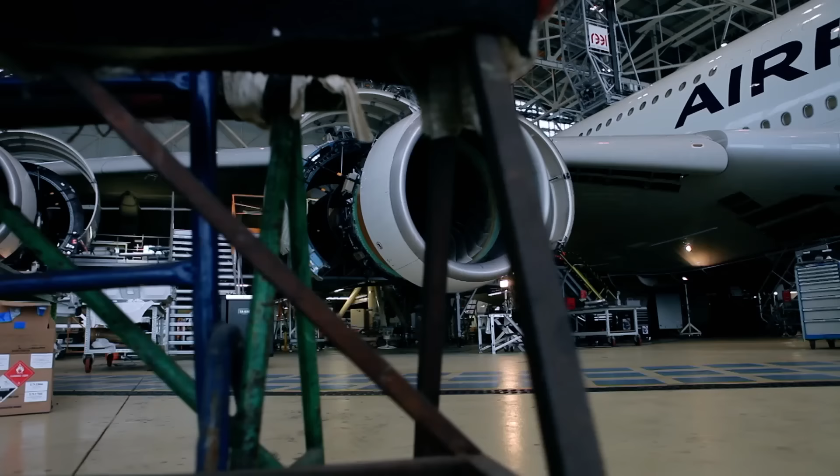The biggest passenger plane the world has ever seen. When you see that huge monster, impossible that this big thing is gonna fly. No way. It's cutting-edge aerospace engineering. A massive fly-by-wire system like this is an incredible tool of safety for the aircraft itself. And the pioneering historic innovations. What an incredible sensation!

Cayley was the first person to recognize the important forces that are fundamental to understanding flight. That made the impossible possible.

Since the birth of aviation a century ago, air travel has reached monumental proportions. Now, over 3 billion passenger journeys are taken each year. That's the equivalent of half the world's population taking to the skies. With terminals overrun and runways congested to breaking point, aerospace engineers are looking for solutions.

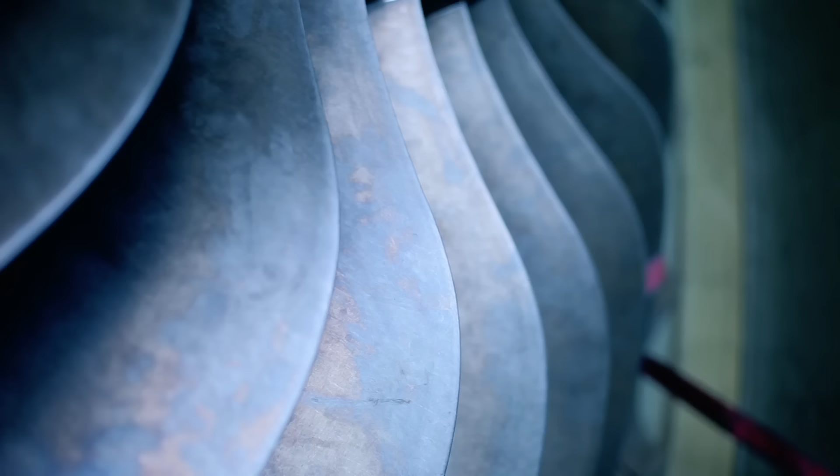15, 20, 30 years ago, the challenge in the aeronautical field was mainly speed. Then the new objective of Airbus, Boeing, for example, was the size of the aircraft. In order to reduce the 100,000 daily flights across the globe, aircraft designers would need to think big. And in 2007, what they came up with would smash aviation records.

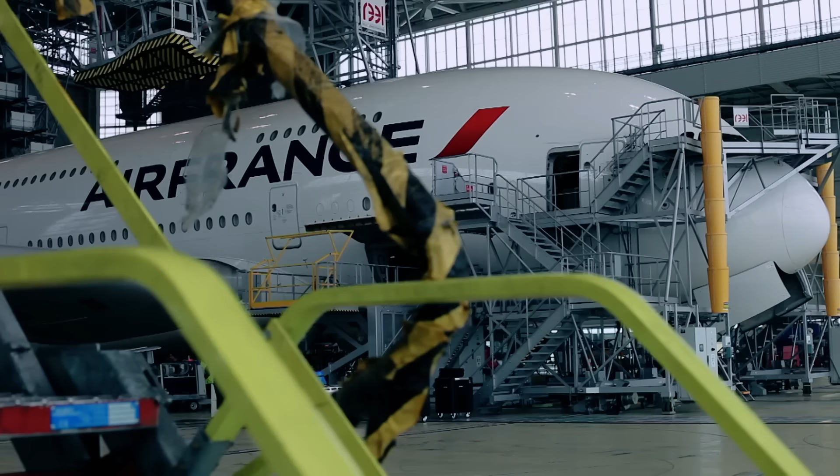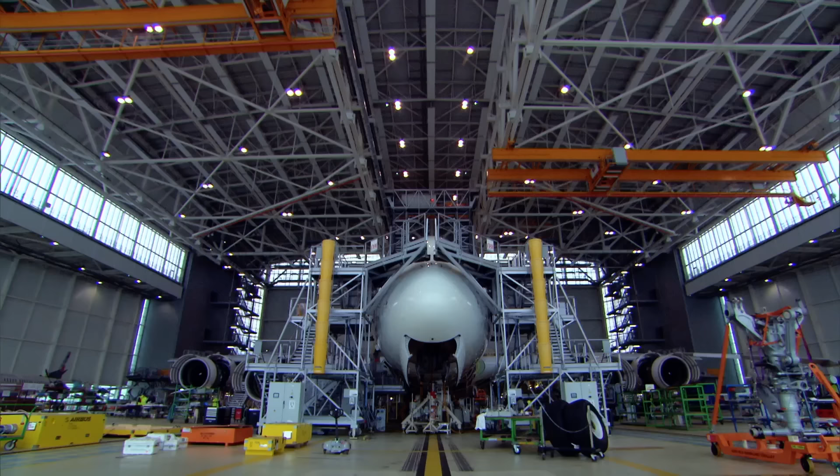This is an Airbus A380, an ultra-high-capacity airliner and the largest passenger plane on the planet. An aircraft so big that Air France have had to create a giant cutting-edge building just to accommodate it. We built that brand new hangar to welcome that huge monster, that huge aircraft, so big that our hangars couldn't fit that kind of aircraft.

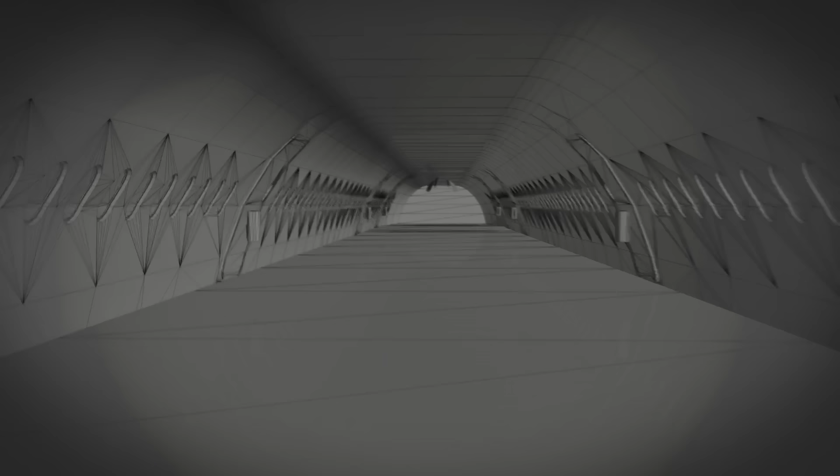This revolutionary double-decker plane has an almost 80-meter wingspan, the largest of any commercial aircraft. It has 550 square meters of usable floor space, a massive 40% more than the next largest airliner, allowing it to carry up to 850 passengers. And its mighty turbofan engines and state-of-the-art design mean it can fly non-stop almost halfway around the planet.

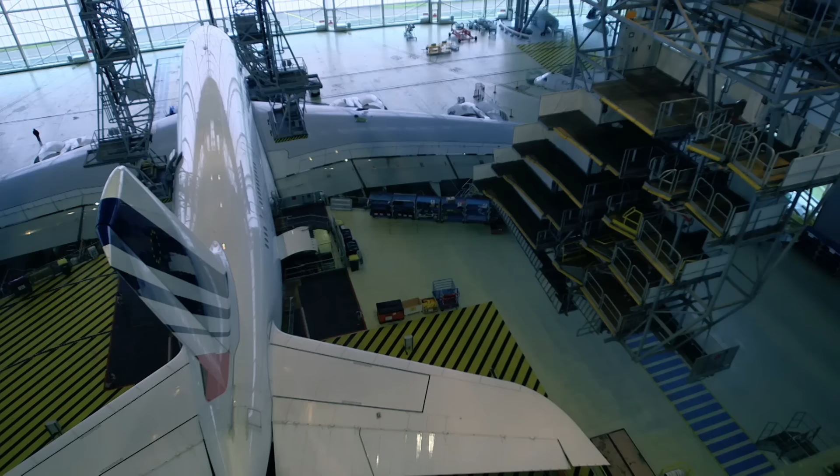At its custom-built high-tech hangar in Paris, this Airbus is being stripped back as part of its scheduled 4-year service, revealing the secrets of its engineering success. And for maintenance manager Sylvain Fargo, it never fails to impress. The first time when I see it, the first word was wow, and it's still wow when I see it.

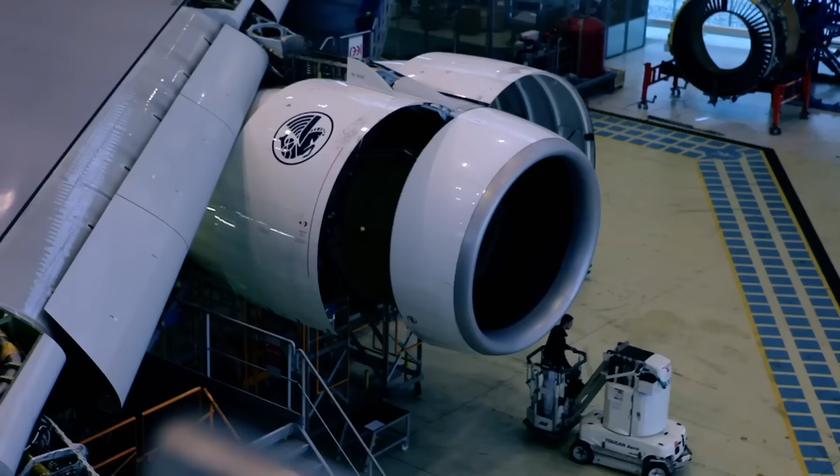This aircraft was part of what we could call a jump in the aeronautic industry. New technologies required from us to train our mechanics, our engineers, so it's quite a step through future. The A380 is a colossal feat of engineering that would have once been thought impossible.

In 18th century Paris, the Montgolfier brothers, noticing that hot air made a paper bag rise, built a hot air balloon and made history with the first ever lighter-than-air manned flight. Oh, très bien, magnifique. Although their design did have its drawbacks.

But for a flying machine heavier than air to take off and remain airborne, engineers would have to learn how to harness the forces of nature. This would remain an impossible dream. Until, in 1804, British scientist Sir George Cayley closely observed birds and finally unlocked the mystery of flight, earning him the title, the Father of Aeronautics.

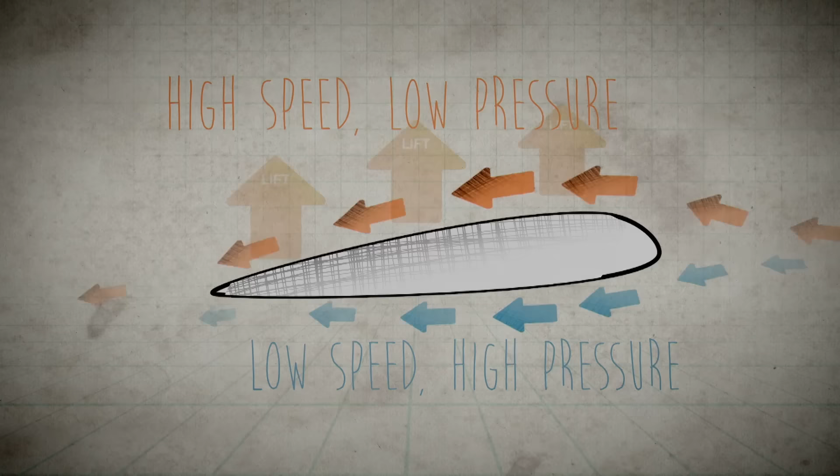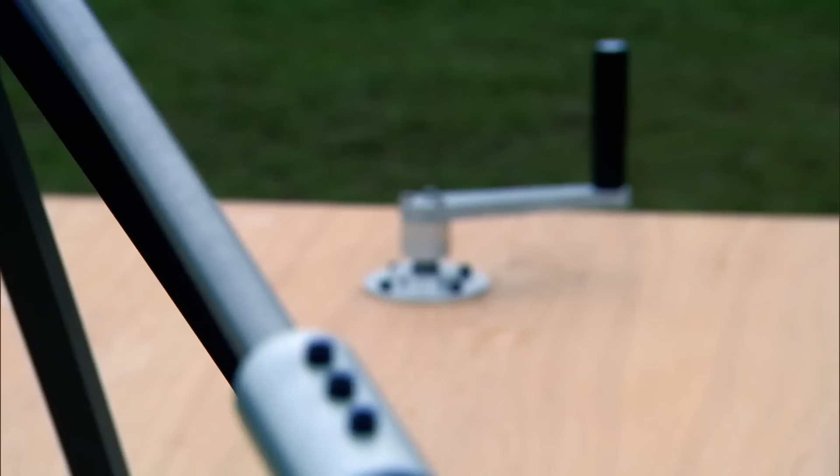By turning the aerofoil upside down, aerospace engineer Dr. Ben Evans can demonstrate how this shape can successfully conquer the forces of gravity. Now, in this experiment, on one side we've got weights representing gravity, the force that needs to be overcome, and on the other end, an aerofoil. And as this spins, the arm goes level. The air passes over the aerofoil and pulls it down to counteract gravity, which is what lift is trying to do in an aircraft, only upside down.

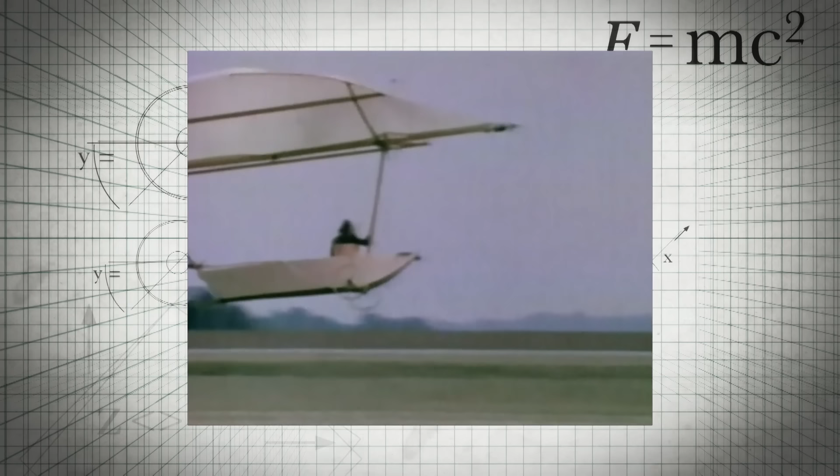In 1853, at the age of 79, Cayley put these ideas into practice and launched the world's first heavier-than-air manned glider. Sir George Cayley had made the impossible possible. It's amazing what you get it to do when you know how.

Cayley's achievements have inspired generations of aerospace engineers to reach for the skies. By doing some very simple experiments, he managed to show what allows a wing to generate lift, just like the wing of this glider that is allowing us to hang here in the skies.

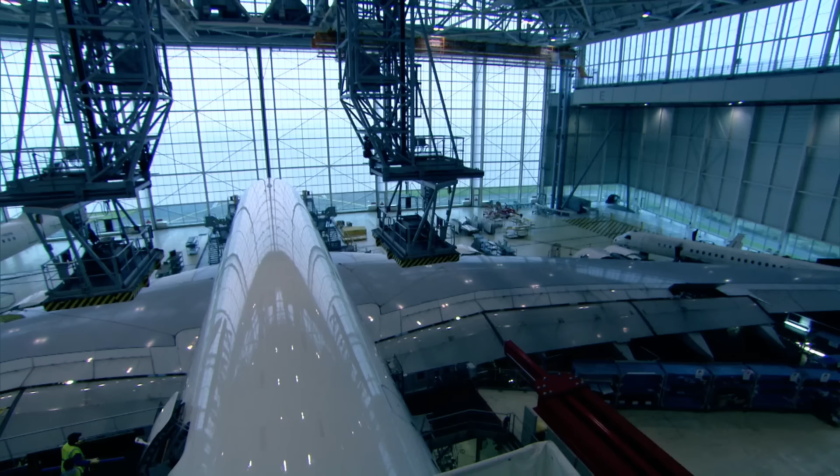Without the concepts that George Cayley developed, the giant engineering feat of the Airbus A380 would not be possible. When you see this aircraft so huge, you can say, but impossible that this big thing is gonna fly. No way. But in fact, it's only aerodynamics.

The A380's wings apply the same principles that Cayley exploited, but on an enormous scale. With an almost 80-metre span and a surface area of 845 square metres, they're big enough to park 20 of Cayley's gliders on top. In its custom-built hangar in Paris, this A380 is in for a comprehensive service, allowing technician Charlie Jackson to get up close and personal with these engineering masterpieces.

As this aircraft is taking off down the runway and generating speed, the tips of the wings actually will raise up about 4 meters, which is a sign that the wing is generating the lift that it's going to need to carry such a large aircraft into flight.

To create a wing big enough to generate lift but small enough to minimize drag is a design conundrum. On the A380, special high-lift devices, slats on the front and flaps on the back, allow the wing to increase its size and curve depending on how much lift is required. The wings also maintain the plane's aerodynamic qualities in a more surprising way.

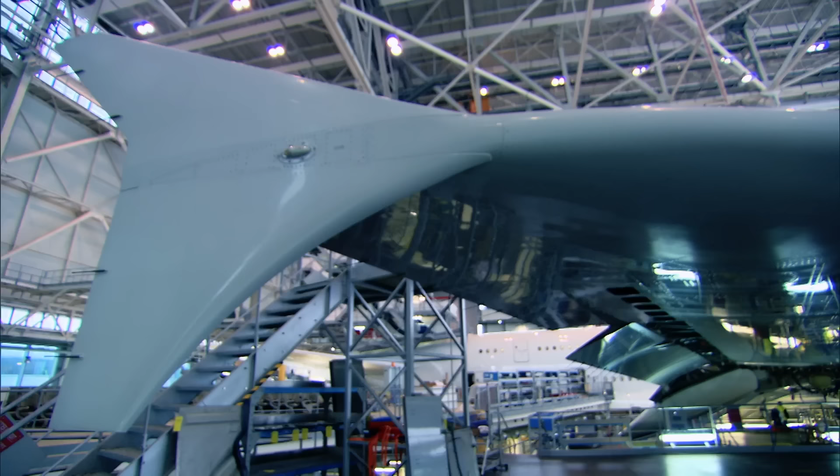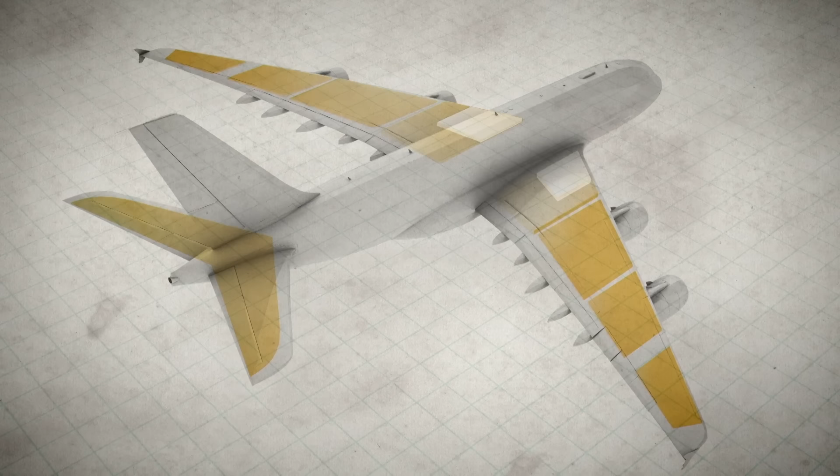The inside of these wings is the fuel, which you need to complete your flight. The plane has 11 fuel tanks, 5 in each wing and 1 in the tail. Fuel is stored in the inner tanks to reduce weight at the wing tips. After takeoff, it's pumped to tanks across the whole wing. Throughout flight, the system constantly adjusts the fuel to maintain the centre of gravity.

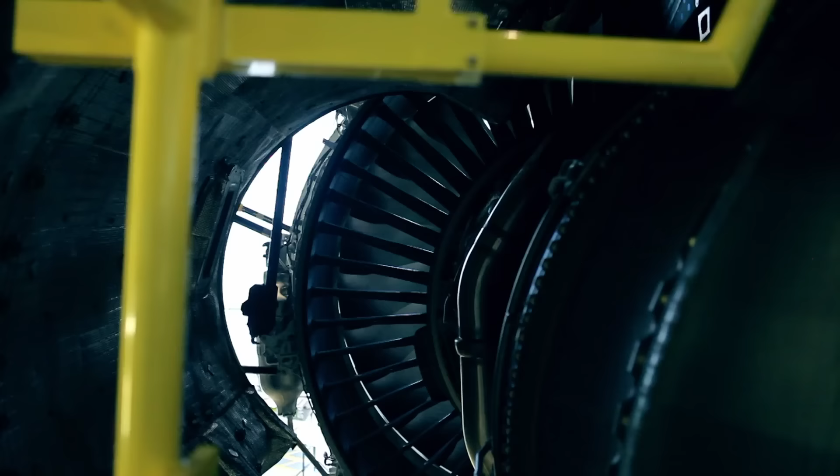This wing is the product of good design. If it hadn't been that way, it just wouldn't be practical to make an aircraft that size. But to create a super jumbo, unlike any other plane in the skies, its designers and engineers would face further major challenges and have to draw on innovations from the past. What an incredible sensation! I can feel the acceleration pushing me back into my seat. To produce more impossible engineering.

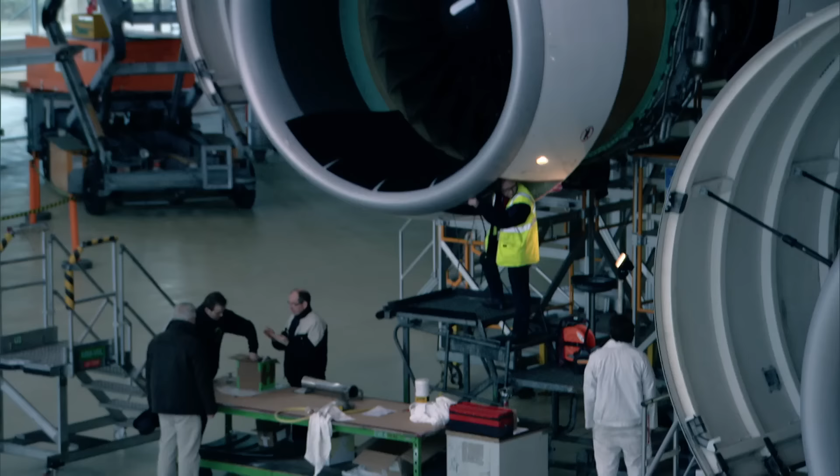The Airbus A380 is a triumph of 21st century aerospace engineering. The largest commercial airliner in operation today. At its state-of-the-art, custom-built hangar in Paris, this A380 is undergoing its 4-yearly service, allowing admiring technicians to get intimate with this colossal feat of impossible engineering. It's a big aircraft. You cannot imagine that it's going to go and fly so easily.

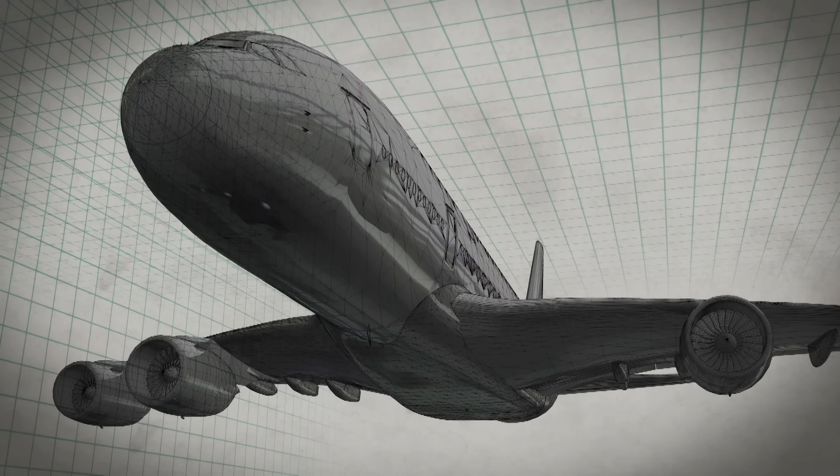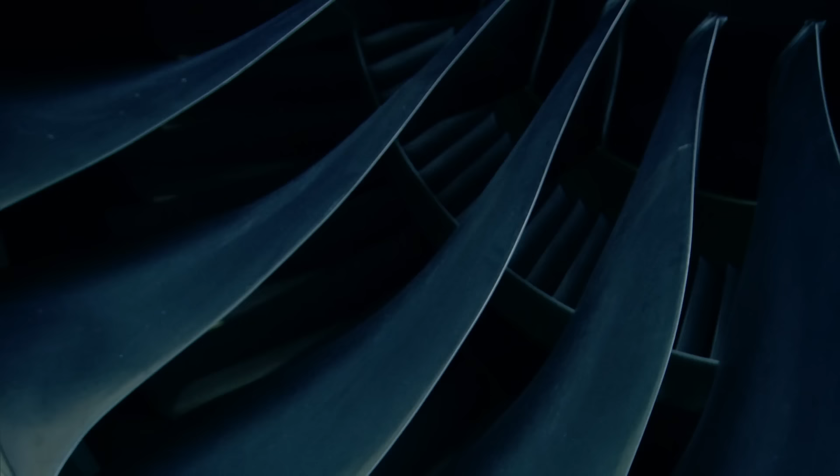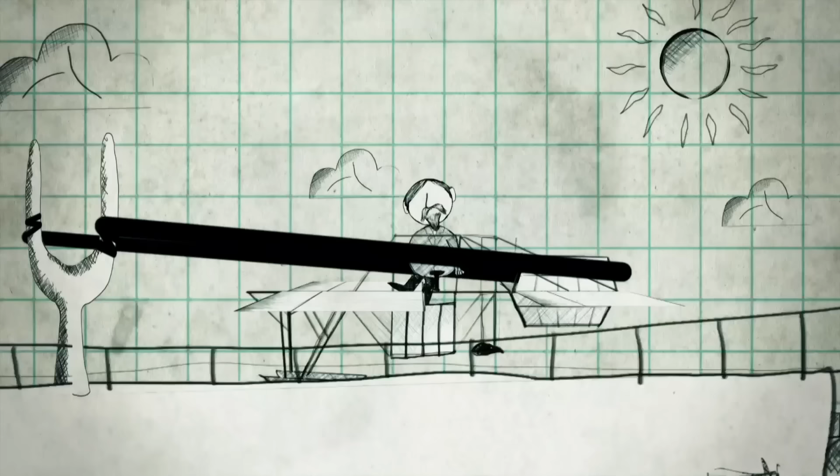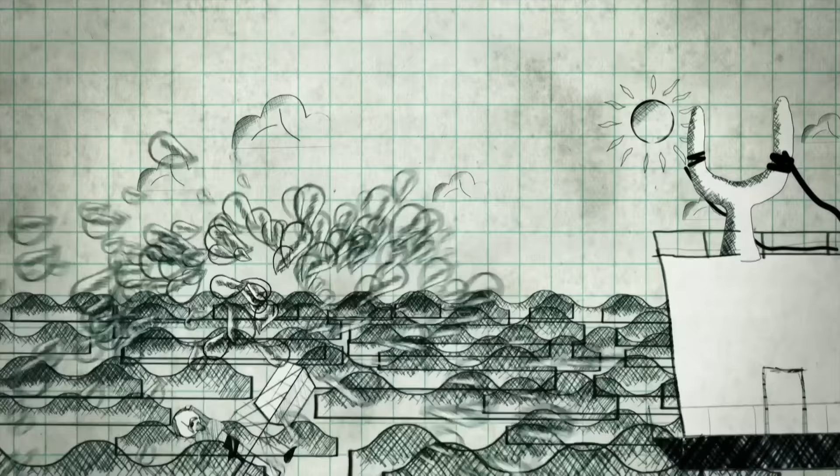By the late 1800s, aviation pioneers recognized the need for power and thrust to obtain flight. In 1874, Frenchman Félix du Temple attached a steam engine to a monoplane. Et voilà! But the weight was all too much. Sacré bleu! In 1903, American professor Samuel Langley built a giant catapult to aid launch. But the takeoff didn't go as planned. Luckily, 2 siblings from Dayton, Ohio were about to make one of aviation's most significant breakthroughs.

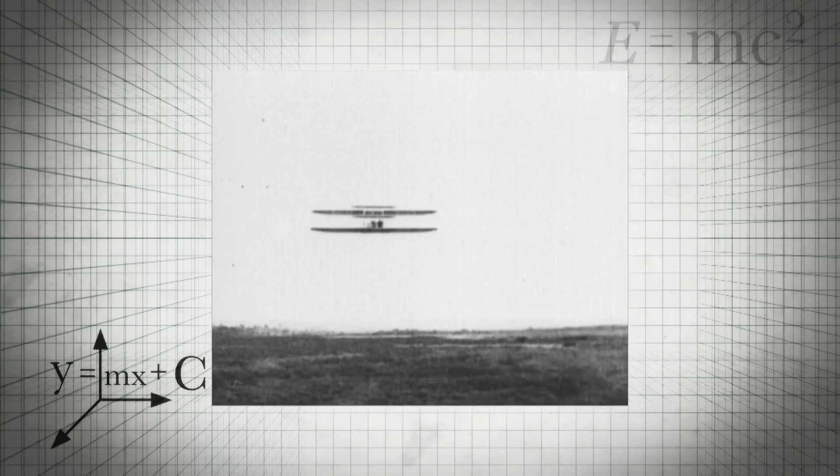In December 1903, Wilbur and Orville Wright launched the maiden flight of the Wright Flyer. Two propellers driven by a piston engine gave the plane enough thrust to take to the air. Although only lasting 12 seconds, covering 36 meters, it was the first controlled powered flight and heralded the birth of modern aviation. However, more than a century on, getting a plane more than 1,500 times heavier than the Wright Flyer airborne would be impossible without a remarkable British innovator.

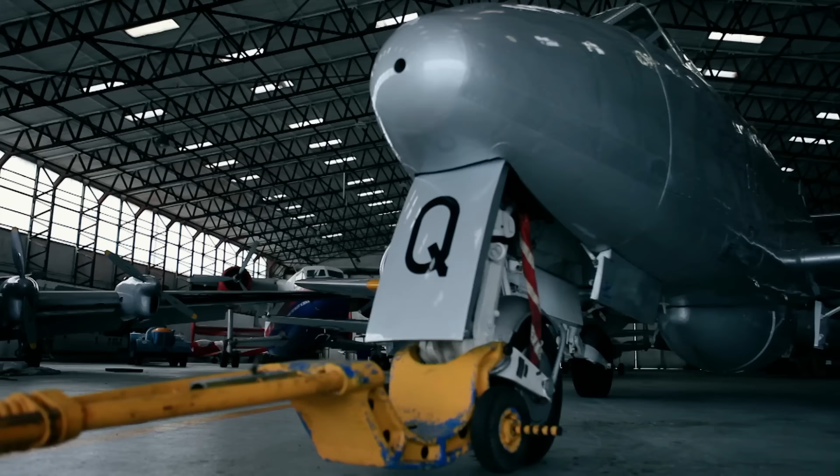Up until the late 1930s, piston-engine propeller planes had been the aviation standard, but they were limited in range, speed, and altitude. A radical solution was required. What an incredible sensation! Aerospace engineer Dr. Ben Evans is experiencing firsthand the power of the Gloster Meteor, Britain's first ever jet fighter, and impossible without the genius of a British engineer: Frank Whittle, pioneer of the turbojet.

I can feel the acceleration pushing me back into my seat. And these two engines kick into work either side of the aircraft. You feeling okay? Yeah, good. Whittle's new engines were powerful enough to carry the Gloster Meteor vast distances at 12,000 metres high and at almost 1,000 kilometres per hour. This was a leap forward in terms of the possibilities of what aircraft would be capable of doing.

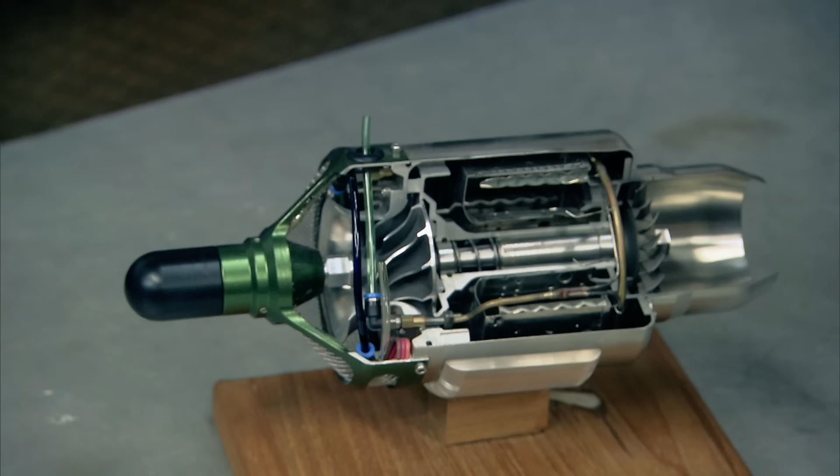As effective as it was, the concept behind the engineering was deceptively simple. In essence, the way the jet engine works is you have suck, squeeze, bang, blow. You suck air in at the front here, and then that passes through a spinning compressor. And that compressor squeezes the air down, increases the pressure and the temperature of the air before it passes into the combustion chamber. Now, this is the point where the fuel is added and ignited. This increases the temperature and the pressure of the gas even further.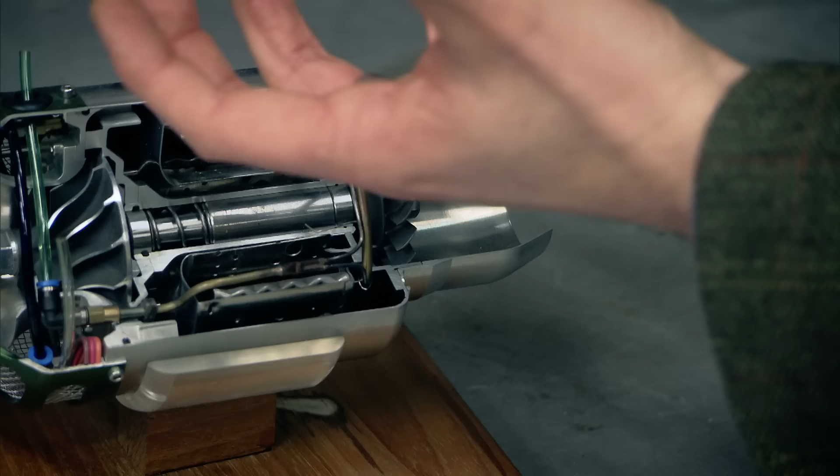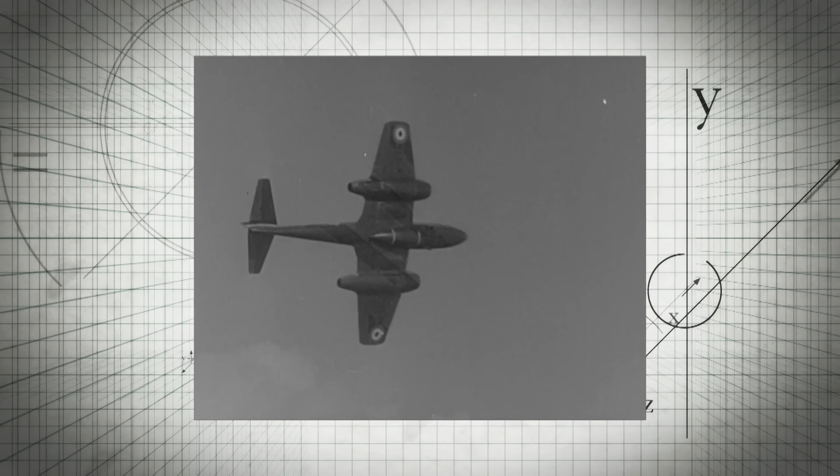And then all of those hot exhaust gases have to expand, speed up through the back of the engine, and they pass through this turbine. And the turbine is connected via a shaft down the centre of the engine to the compressor at the front, making that spin. But what pushes the engine forward, what generates the thrust, is the expansion and the acceleration of the exhaust gases out of the nozzle at the back of the engine. Whittle's turbojet allowed aircraft to fly faster, higher, and further, and changed the face of aviation forever.

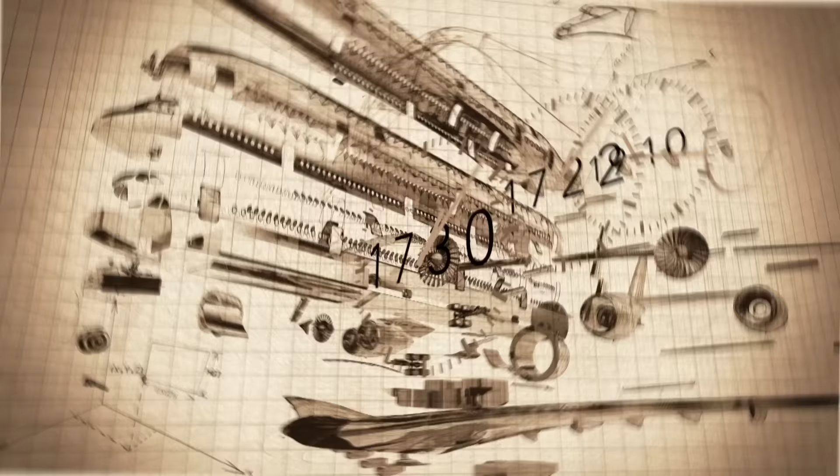So successful was Whittle's design that the jet engine has just become a standard now on modern commercial transport aircraft. The dream of travelling faster, higher, safely, and more economically all over the world became a possibility. To launch the A380, engineers would need to take Whittle's jet engine and augment its capabilities to an unprecedented level. That size of aircraft couldn't exist before, so they had to develop and design brand new engines to suit what's required to have it going up in the air.

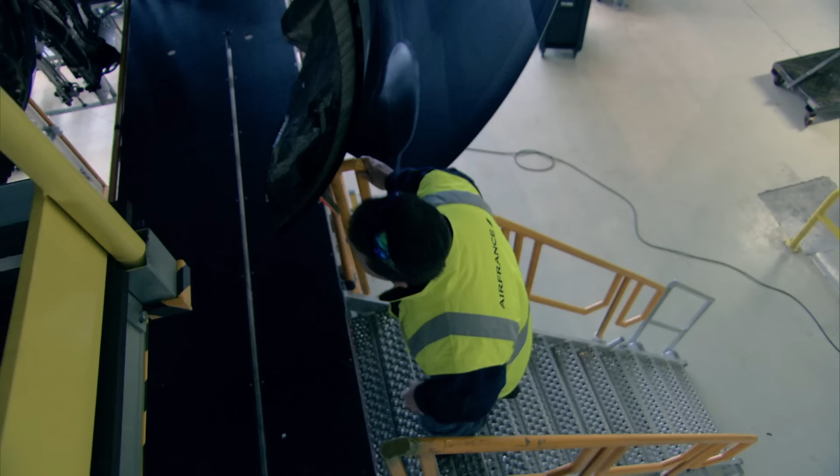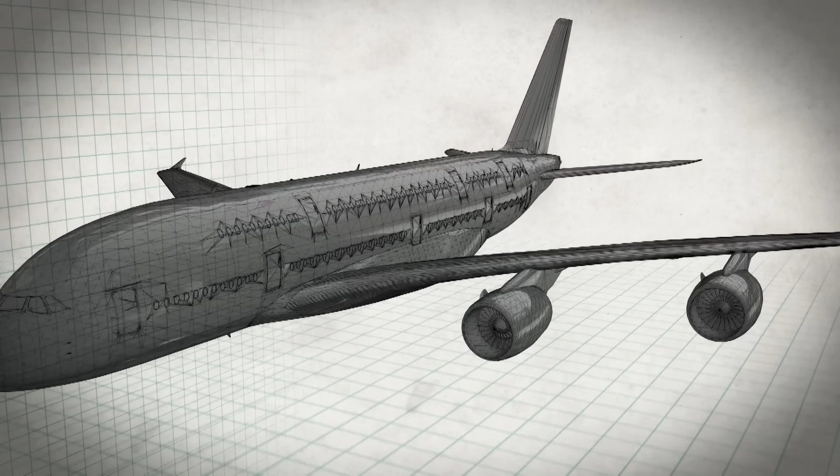While it is serviced in the giant purpose-built hangar, technician Charlie Jackson has the chance for a detailed examination of the engines that power the monster plane. The A380 has 4 huge engines, 70,000 pounds of thrust each, full of new technologies. It's one of the most advanced engines that's available on the market today. These 4 specially developed mighty GP7200 turbofan jet engines are amongst the most powerful ever built. Each draws in enough air to inflate a hot air balloon every 3 seconds, and is nearly 50 times more powerful than Whittle's first turbojets.

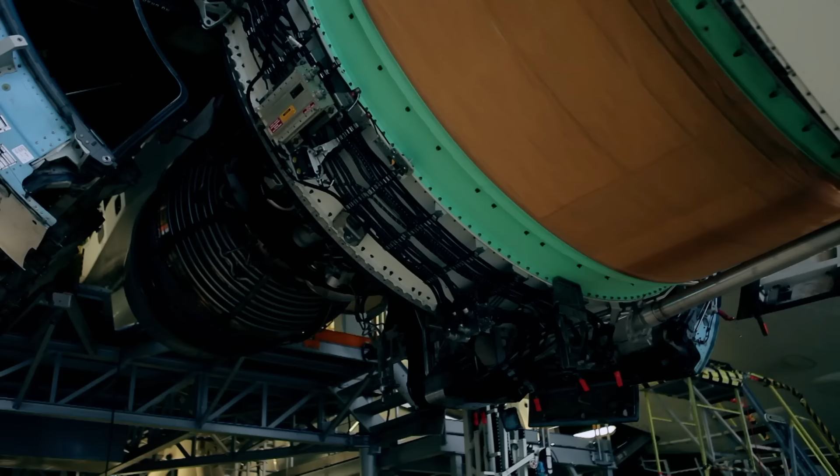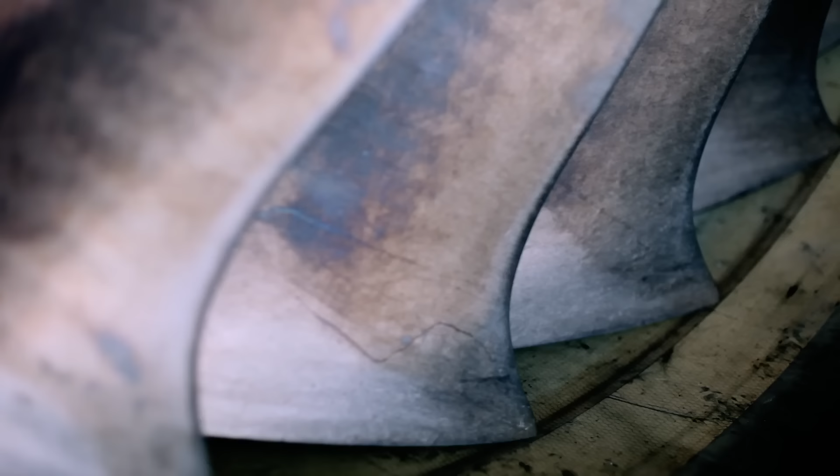But in the modern world, its designers faced challenges that were about more than just power. The main difficulty is to define an engine that is powerful, that gives economy to the airlines, and reduces noise. Thanks to state-of-the-art design, the A380 burns 22% less fuel per seat than the average 747 jumbo. These fan blades have been designed specially for this aircraft. They have a very revolutionary new shape to increase the airflow through the engine. 70% of the thrust from the engine actually comes from these blades, and not from the motor itself, which is burning the fuel and turning these blades.

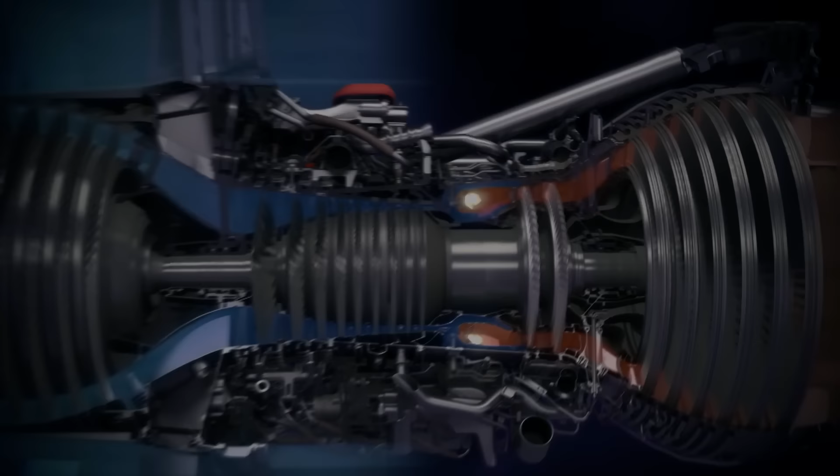Each of the 24 hollow titanium blades is boomerang-shaped, with a reversed sweep at the tip. This shape slows the air from supersonic to subsonic speeds, not only making the A380 more fuel-efficient per passenger than a family car, but also making it substantially quieter. This aircraft is well below the limits of noise for the size of the aircraft. It's setting the standard.

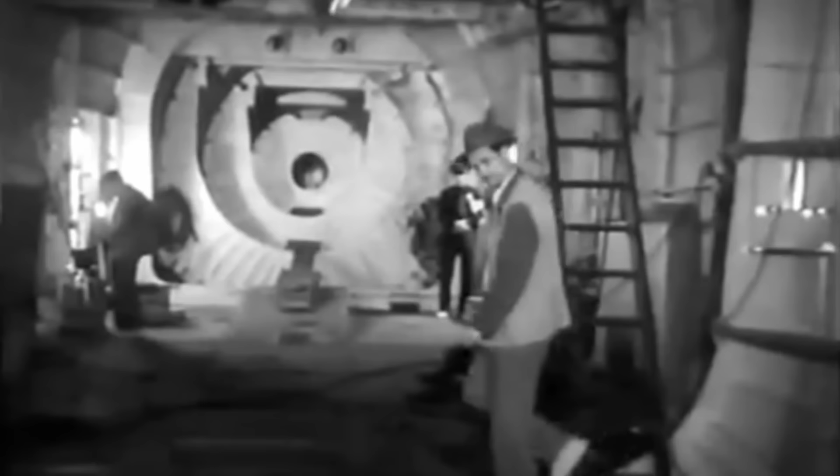The Airbus A380 is the biggest passenger airliner ever built. Capable of single flights of nearly 16,000 kilometers, it is a triumph of aerospace engineering. Getting an aircraft of this size off the ground to fly practically halfway around the world is an engineering feat. The aircraft's huge range is mind-boggling, but it also provides designers with a challenge.

The A380 would be capable of flying from Dallas to Sydney non-stop. And gigantic journeys require extra provisions for passenger comfort. Its 2 passenger decks provide a total area of 550 square meters, equivalent to 3 tennis courts.

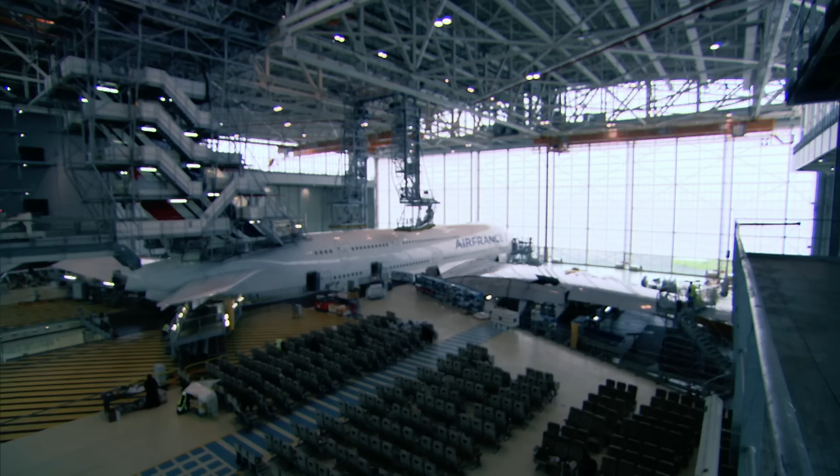At a high-tech hangar in Paris, this Airbus is being stripped back as part of a scheduled service, revealing its engineering secrets. It's quite impressive to fly on this aircraft. As you can see, it's a very long aircraft. In the business class, you have 80 seats. That's quite important. But designing for comfort isn't new. In fact, one of aerospace's earliest and most successful innovators set the benchmark.

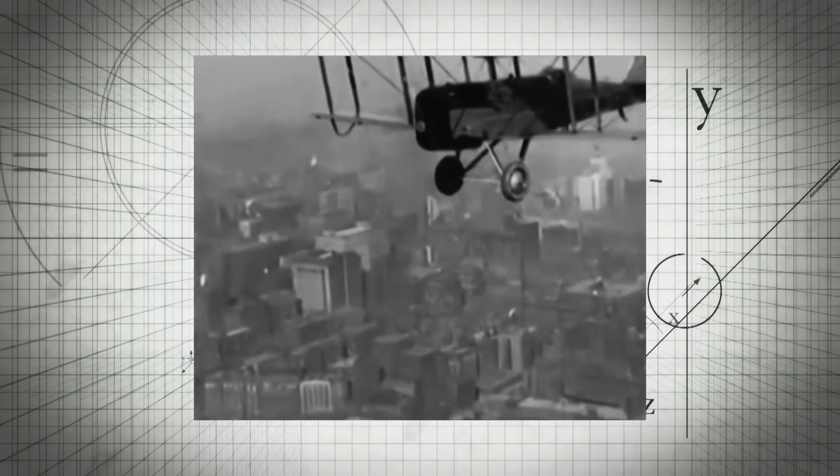The early aviators who took to the skies had little choice but to wrap up warm and brave the elements. But one man had other ideas. In 1913, brilliant Russian engineer Igor Sikorsky conceived the Ilya Muromets, a plane engineered for luxury travel and the world's first airliner.

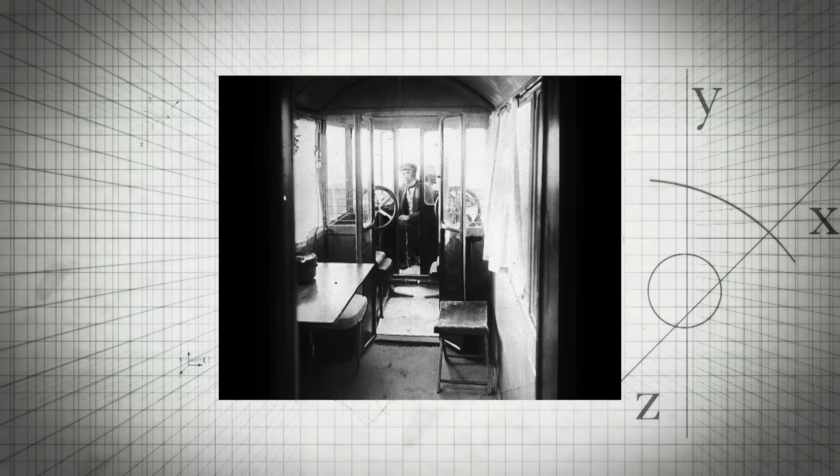By using a wind-driven generator and running pipes of hot air from the engine through the saloon, there was electricity and heating, a bedroom, toilet, and comfy seats. 16 passengers could travel up to 600 kilometers in style. With the onset of the First World War, after only 1 year in service, the aircraft was redesigned as a bomber. But the legacy of the Ilya Muromets opened a new world of aviation possibilities.

Capable of carrying hundreds of passengers in supreme comfort, over almost 16,000 kilometers, the A380 has redefined long-haul travel. When you see the aircraft outside, it's so big that when you come in, when you have a seat, you can imagine how loud it's going to be when it's going to take off. But in fact, no, it's quiet, and you don't even know you're in the air.

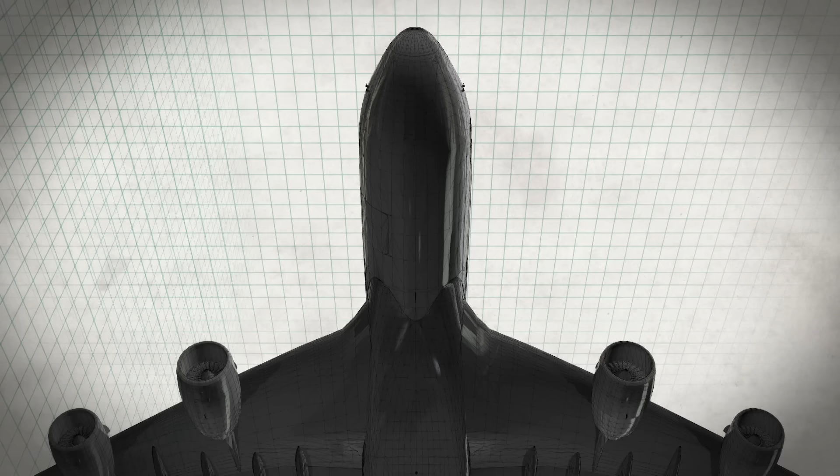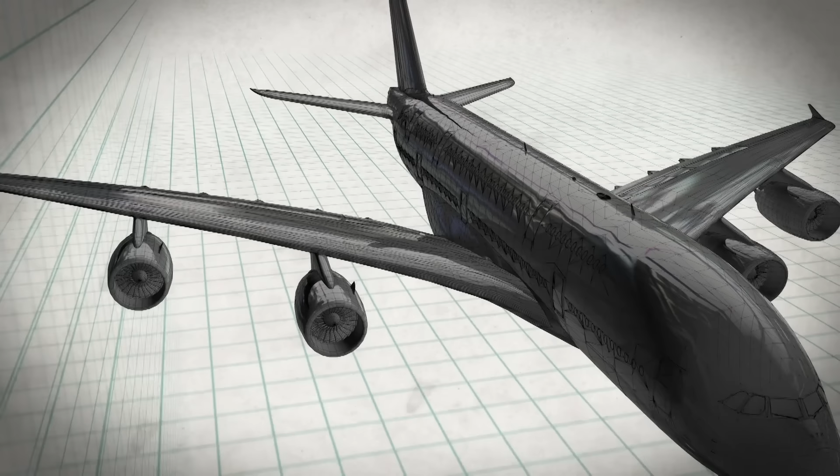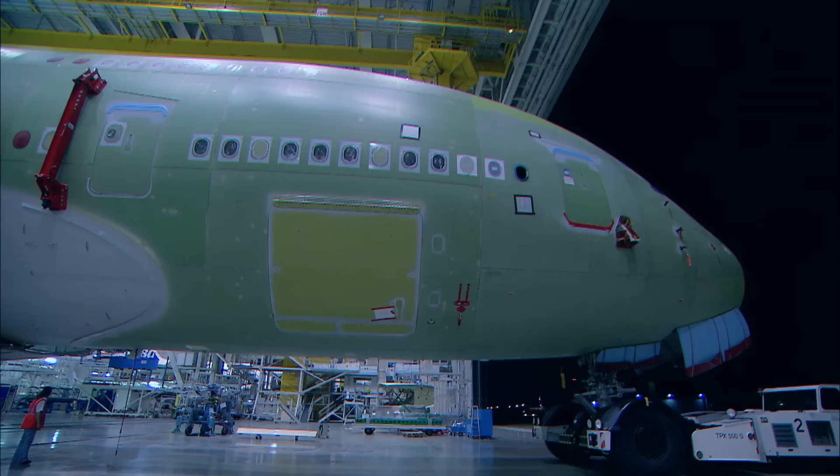Since the 1920s, aluminium has been the material of choice for aircraft skins. It's flexible, strong, and light. But when you've set yourself the challenge of building the largest commercial airliner in the world, on which the paint alone weighs half a ton, every single gram counts. If the whole airplane had been made from the traditional aluminium, it would have been catastrophic to the design. It would be way too heavy. They would have had to have bigger engines, bigger wings, it would have burned a heck of a lot more fuel, and it wouldn't fly very far.

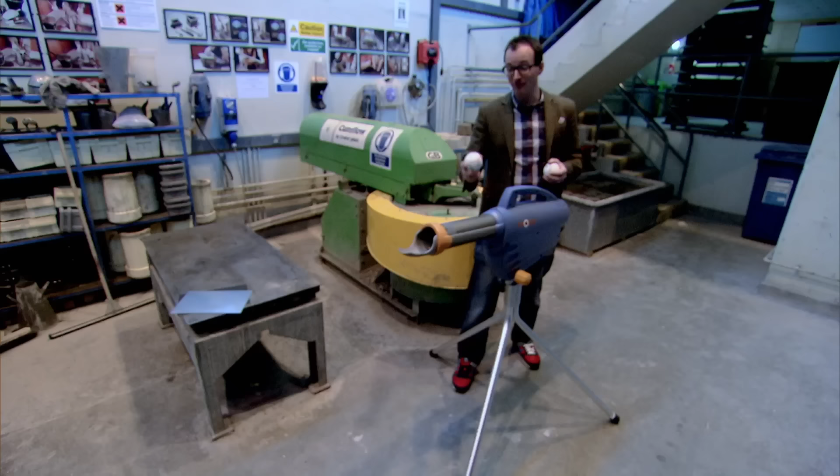Decreasing the weight by reducing the thickness of the aluminium skin simply wasn't an option, as engineer Ben Evans demonstrates in his lab at Swansea University. So this gun is going to fire these baseballs at high speed at our target in the stand, and we'll find out how much damage they do. The aluminium sheet is approximately half the thickness of a traditional aircraft skin. Wow, let's have a look and see what's happened. And there's the damage. It's deformed this by a good 5 centimeters or so. So really quite a lot of damage with that impact on the aluminium sample.

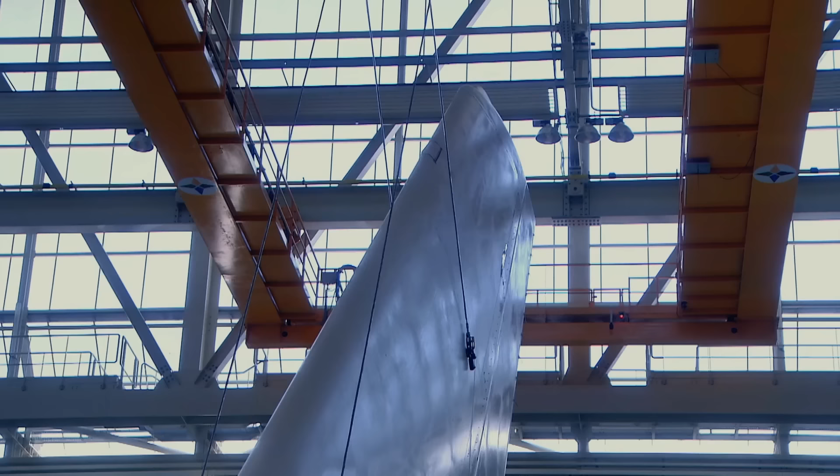The designers of the A380 needed a solution that was at least as strong as traditional aluminium, but lighter. They needed to find materials that could create such a large aircraft that wouldn't weigh like a tank. Solving this engineering conundrum would be impossible without the great innovators of the past.

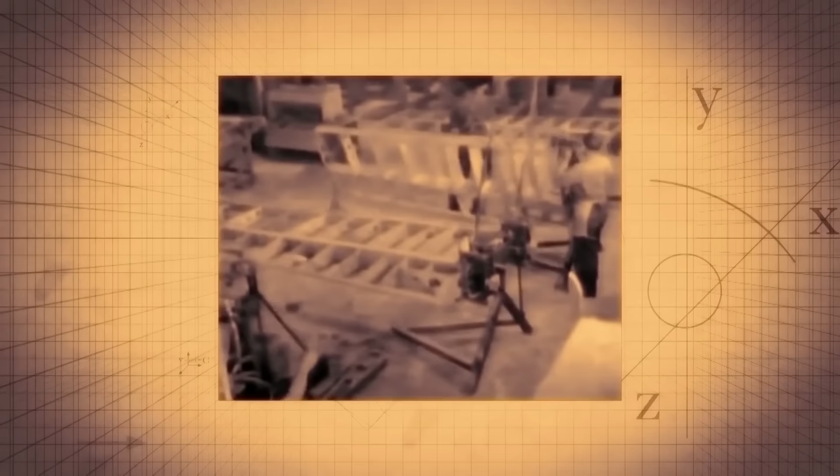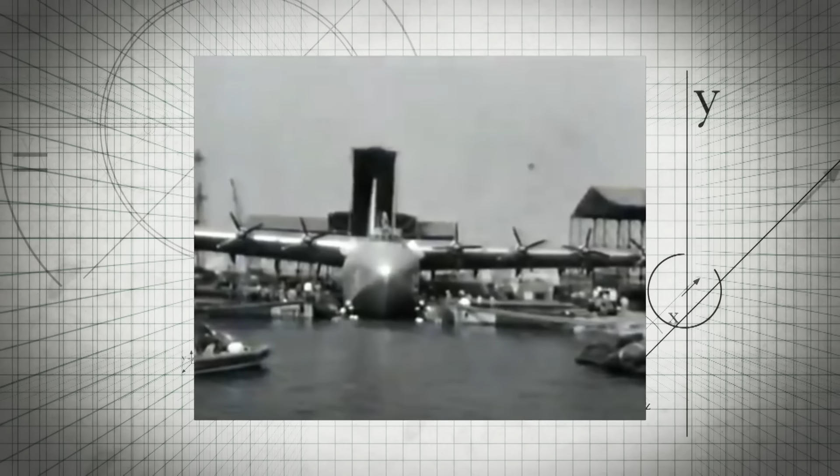In the 1930s, American engineer Virginius E. Clark created a brand new alternative to aluminium. Birchboard was impregnated with phenolic resin and laminated under extreme heat. The resulting material he called Duramold. Used in Howard Hughes' famously enormous Spruce Goose seaplane, it was one of the earliest and most successful examples of an aviation composite.

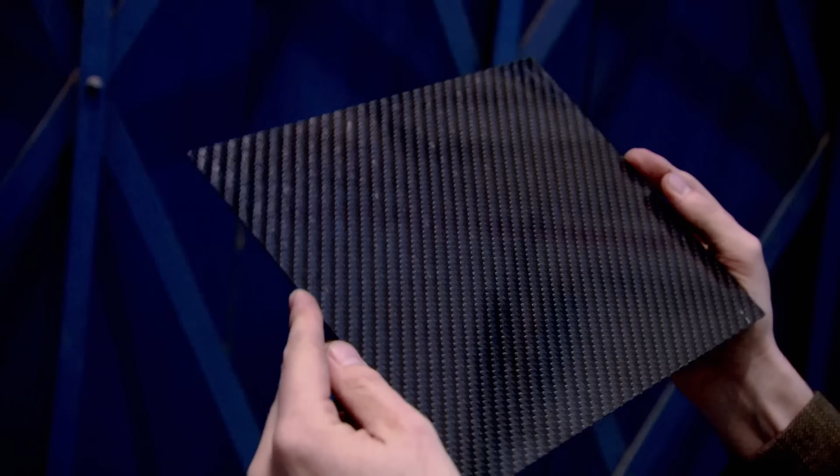Composites are made up of more than one material and take advantage of the best of both worlds. What we're going to do to prove this is the case is impact test a composite. This composite is a woven carbon fibre impregnated with epoxy resin, the same dimensions as the thin aluminium Ben tested earlier.

Woo! Literally nothing. So that impacted right here, bang in the middle. In fact, there is absolutely no sign that any damage has been done. So these are the results. This is the composite, this is the aluminium, the same impact force, but look at the damage on the aluminium. So that is a result for the composite. A lighter material and a stronger material. And that is why this stuff is being used by aerospace engineers today.

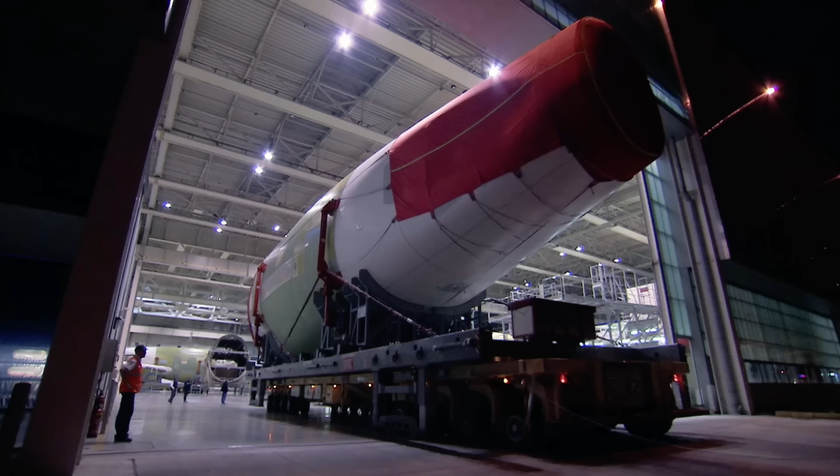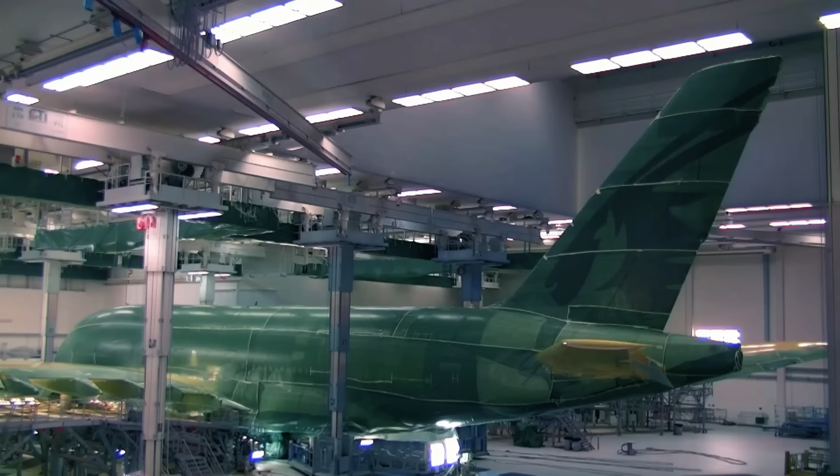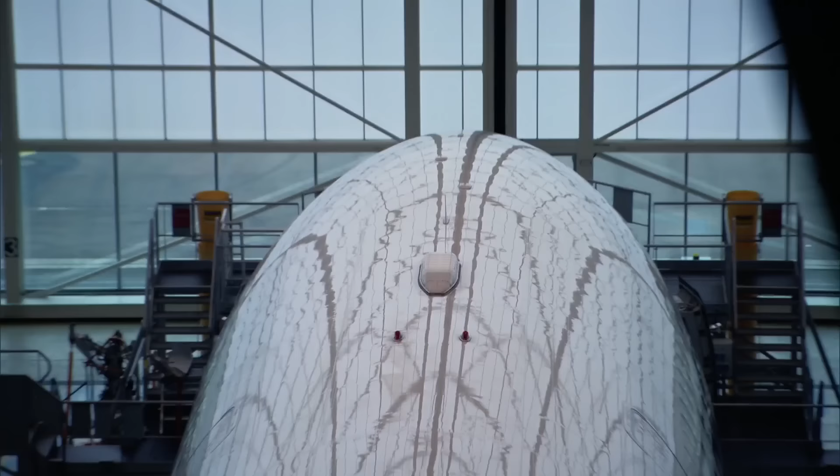To build the world's largest passenger plane, engineers would take Virginius Clark's innovations with composites to the next level and create a brand new material for the A380. Made up of thinner than usual aluminium reinforced with glass fibre, they called it Glare. The composite materials that make up this aircraft, they're as strong as the traditional materials, and they're as flexible as the traditional materials as well.

To give an example of how sturdy they are, there's more than 1 ton of air pushed inside this aircraft when it's flying, when it's pressurized. Using composites saved 15 tons on the overall weight, making this seemingly impossible aircraft possible. If they hadn't used Glare or a similar composite, the aircraft that we have today probably wouldn't exist.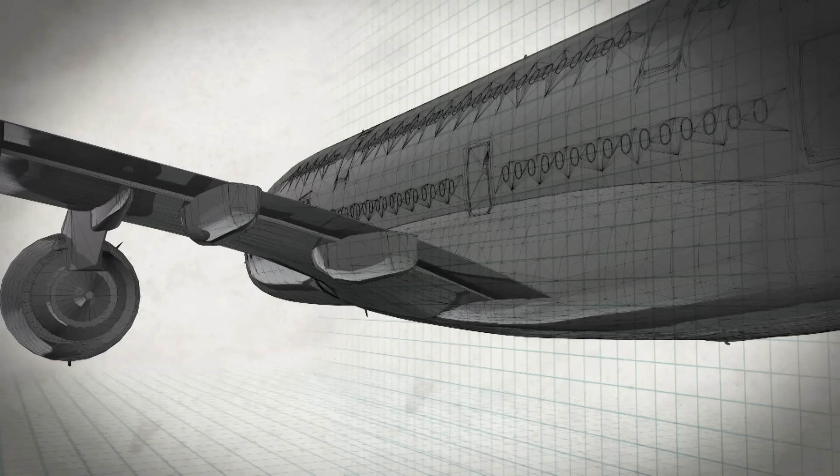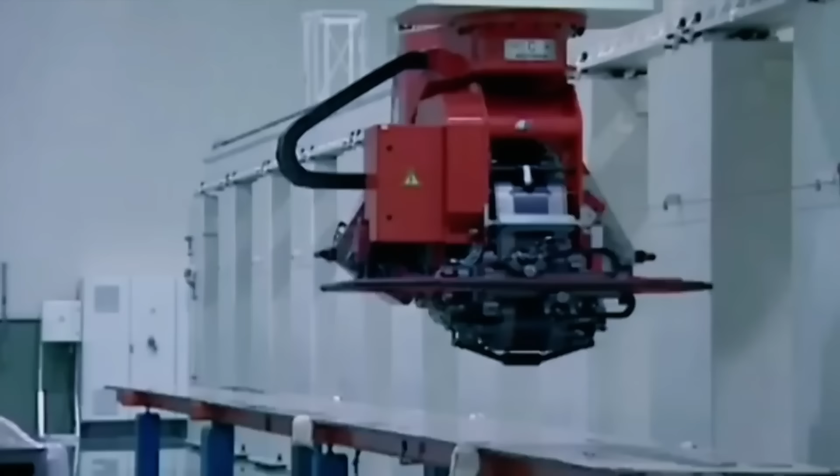It's not just the materials on the A380 that make it stand out from the crowd. Even the method of construction breaks the mold. Sections are built in factories in France, Germany, the UK and Spain before being transported to Toulouse for assembly. The transportation alone required specially commissioned ships and the use of Airbus's improbable-looking A300-600 ST or Beluga super transporter plane.

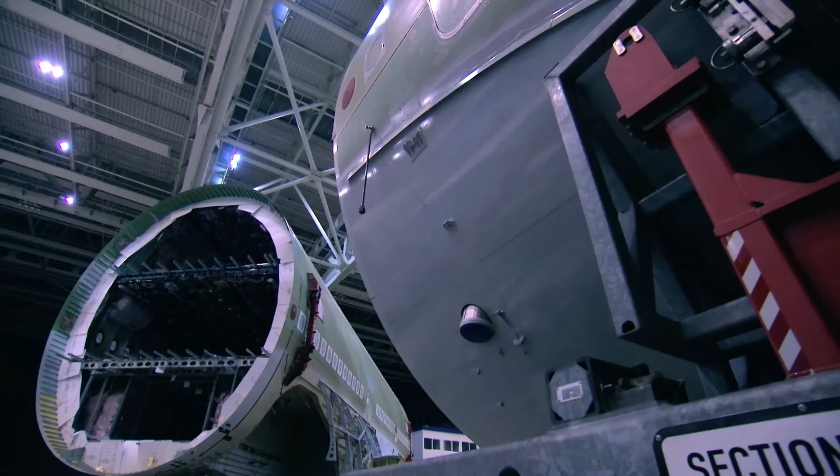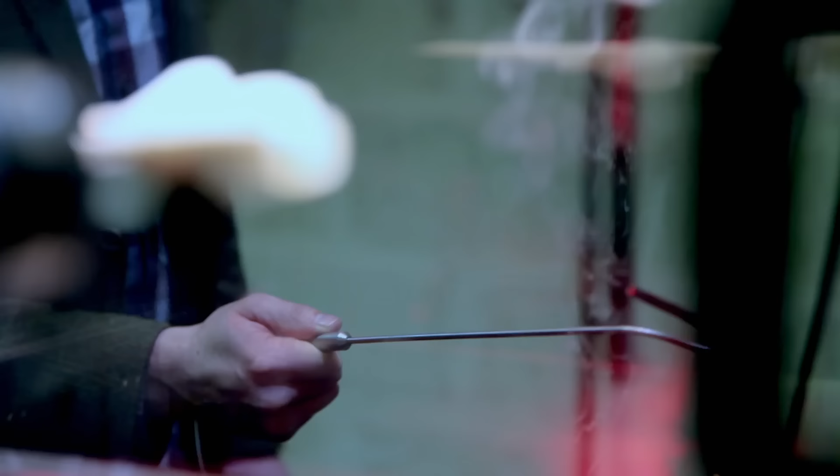Each A380 contains 4 million individual components, which, once assembled, create an airliner of record-breaking proportions. I guess this aircraft makes everybody dream when you see it. When people are waiting to go inside the aircraft, you can see children looking at it. People are really excited. But to make this monster machine flyable, its designers would yet again have to turn to the great innovators of the past. Often in engineering, the simple solutions are the best solutions. To produce even more impossible engineering.

The Airbus A380 is one of the most technologically advanced commercial airliners in the world. The technologies used in the design of this machine were not existing 20 years ago. But for its designers, redefining the terms of modern aviation would mean overcoming some seemingly impossible engineering conundrums. They told everybody in the world that they will build the biggest aircraft in the world, so it was quite a challenge for them. And one of the biggest challenges directly relates to the plane's size.

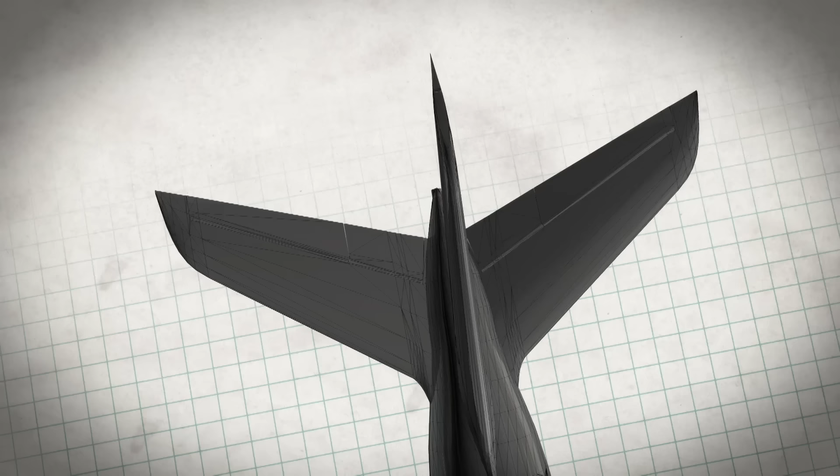Calculations revealed that the ideal, most efficient wingspan for this massive aircraft would be 82.5 meters. But aviation rules state that all planes should be able to fit into an 80-meter box. If the wingspan couldn't be reduced, the A380 would be incompatible with all the world's airports. The answer would lie in one of the great aircraft innovations of the 1970s.

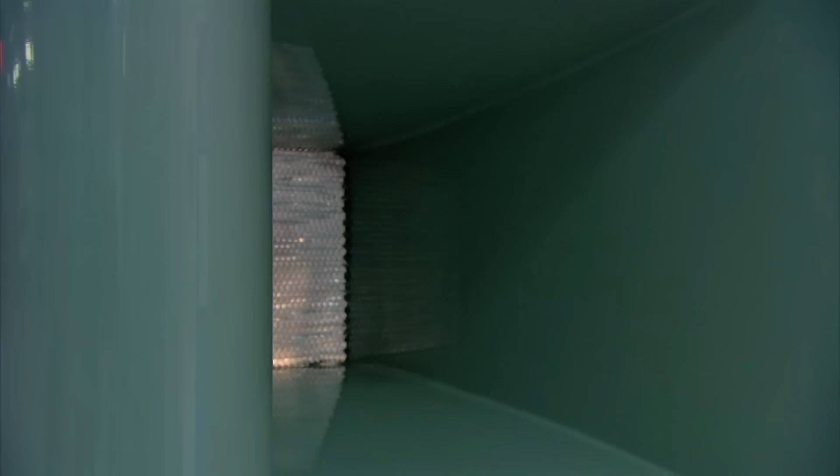In 1973, the world was entering an oil crisis. An embargo on sales to the West saw prices quadruple overnight. And the aviation industry was paying the price. As Dr. Ben Evans demonstrates, traditional wing design has its drawbacks. Aerodynamicists are always trying to improve the efficiency of wings, which really means trying to improve the ratio of the lift to the drag of the wing. One of the things that was causing a lot of drag and dropping the lift on the wing was what's called a wingtip vortex.

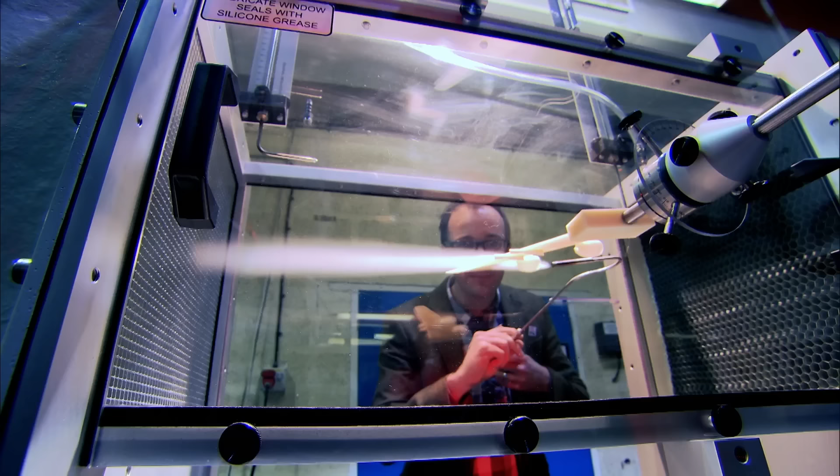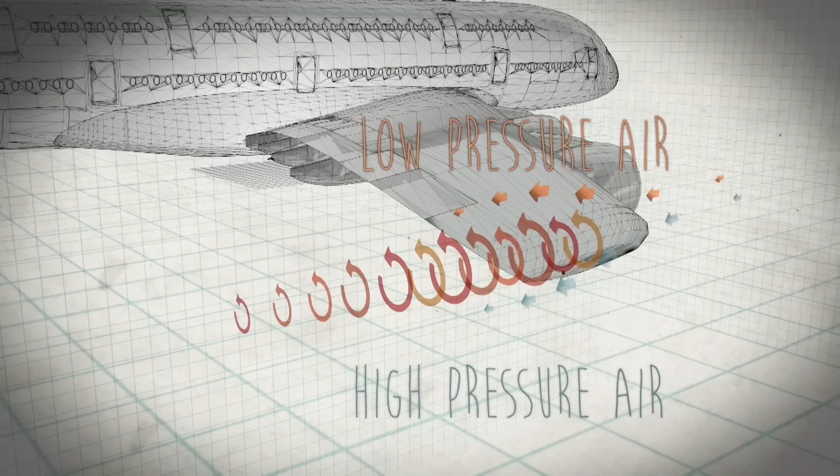The wind tunnel is simulating an ordinary wing traveling through the air at a typical cruising speed. In the central section of the wing, you can see that the smoke is very smooth until it reaches the tip of the wing. And once we're at the tip of the wing, you can see this vortex pattern forming. A wingtip vortex is caused when high-pressure air under the wing spills upwards at the tip to meet low-pressure air above. This creates turbulence and therefore drag, forcing the engine to work harder.

The 1970s fuel crisis meant a solution was needed, and aeronautical engineer Richard Whitcomb, working on NASA's Aircraft Energy Efficiency Program, found one. Whitcomb suggested that by changing the design of an aircraft's wingtips into vertical winglets, they would create less drag and burn less fuel.

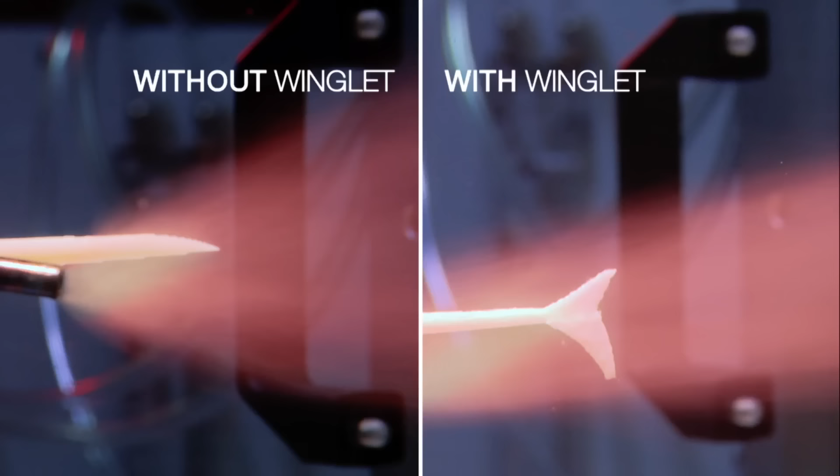As I move the smoke trace towards the end of the wing this time, instead of having the single strong vortex that we saw in the case without the winglets, what's happening now is that the flow is smearing out almost into a sheet, making the wing more efficient. Adding a winglet prevents the mixing of the two airflows above and below the wing, reducing the vortex.

The A380 has specially designed arrow-shaped winglets called wingtip fences. And they allow the wingspan to be reduced to just under the maximum 80 meters without compromising the aircraft's efficiency. Without those design features, this aircraft would be way too big, it wouldn't be practical, and it wouldn't exist today.

Despite its aerodynamic efficiencies, the A380 is still enormous. So how could its creators make it possible for pilots to control this mighty beast, which, fully laden with fuel and passengers, weighs a staggering 560 tons? Once upon a time, it would have been an impossible dream.

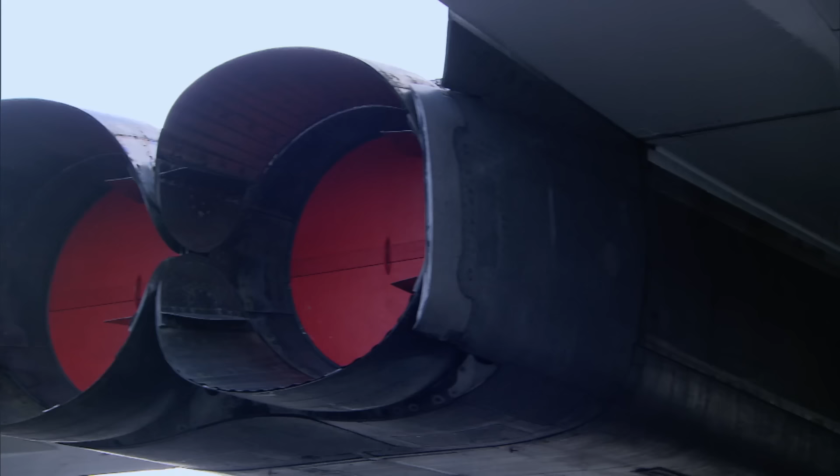By the 1960s, the age of the jet was in full swing. Transcontinental travel had never been easier or faster. But a group of audacious Anglo-French engineers thought it was possible to go even faster. To create a supersonic passenger jet. There were a lot of engineers who said, well, this isn't possible. What you're proposing here is just too ambitious.

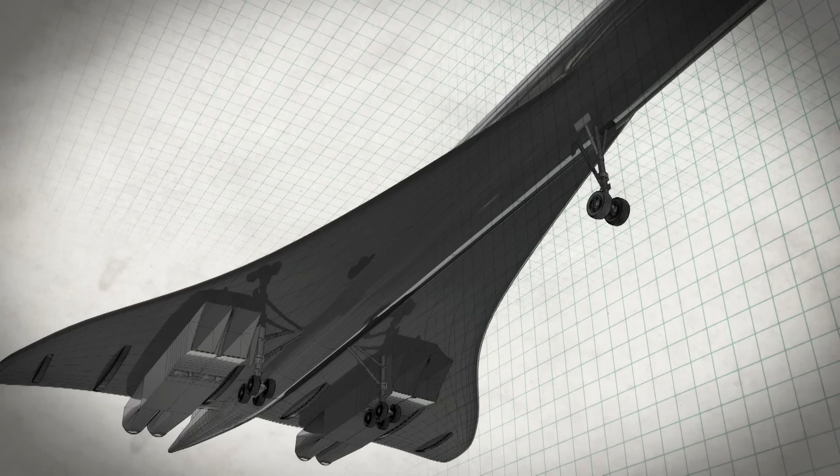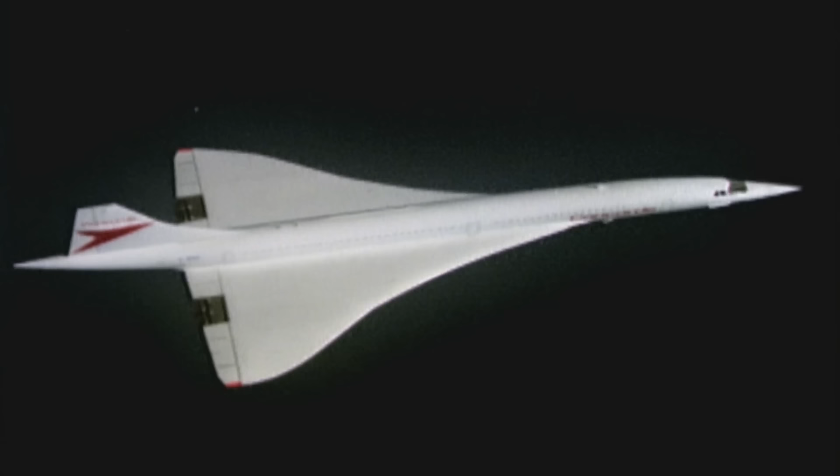The result of the work of those pioneering engineers is this, Concorde. Launched in 1969, Concorde could reach speeds of over 2,000 kilometers per hour. More than twice the speed of sound. Flight times between New York and London were cut in half. But flying this futuristic jet airliner would be virtually impossible using traditional aircraft controls. Concorde would need an innovative new system known as fly-by-wire.

At a simulator at Brooklands Air Museum, former Chief Concorde pilot Mike Bannister explains. You could fly at 1,350 miles an hour, faster than a rifle bullet. Concorde wouldn't have been possible without fly-by-wire because some of the control forces at certain flight conditions really would have been huge. What exactly is fly-by-wire? Fly-by-wire is computers telling systems what I want to do.

On a conventional airplane, when I want to turn left, I do that, and some pulleys and wheels and cables move the controls. On this airplane, when I want to turn, I do that. It tells a computer that tells the controls what to do. That means the airplane's far more responsive, it can be far more efficient, and is capable of being flown by ordinary human beings. Concorde was the first commercial jet to adopt the technology.

What did it feel like to fly the real Concorde? The airplane's a delight to fly. It's like a thoroughbred racehorse rather than a riding school hack, or a sports car rather than a truck. It is so responsive. You can fly it with your fingertips, so why don't you have a go? Very nice. Keep it coming, that's perfect. Right through the bridge. London Assembly Building to the left, the Shard to the left. Fabulous.

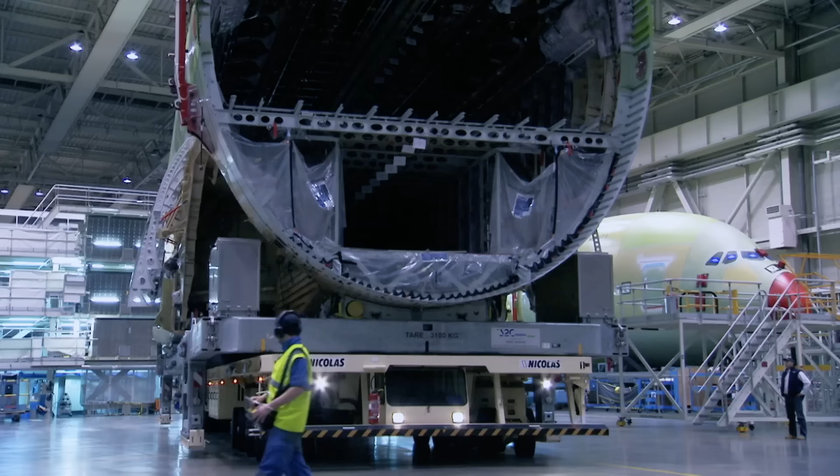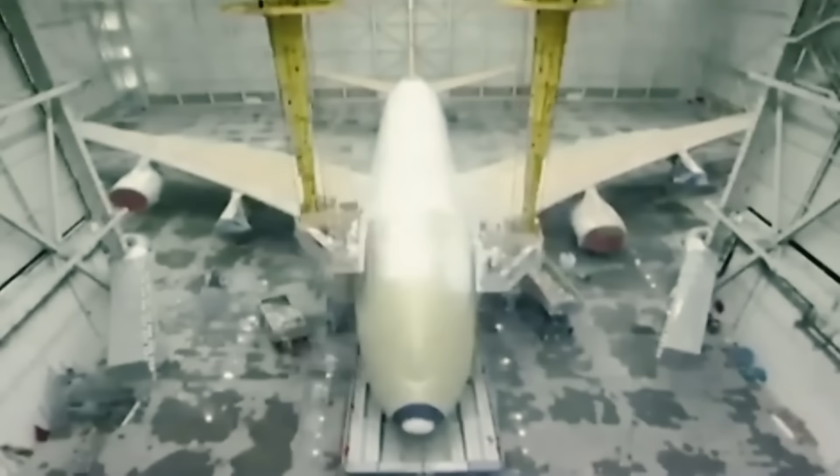Spanning some 13 years, the design and development of the Airbus A380 ranks as one of the aviation industry's greatest achievements. Now the A380 is operated by airlines across the globe, and one takes off and lands every 4 minutes. By drawing on the innovations of the past, adapting, improving them, and making groundbreaking innovations of their own, aerospace engineers overcame extraordinary obstacles and succeeded in making the impossible possible.

It was quite difficult to imagine 20 years ago that the kind of machine you have here was going to exist, but it's now reality. So what about the future? Who knows? Maybe going to space with an aircraft.